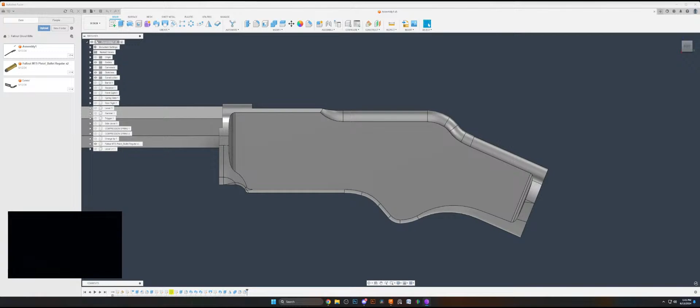All right, guess I gotta turn my cam on. Let's get started back on this - the Ghoul Rifle.

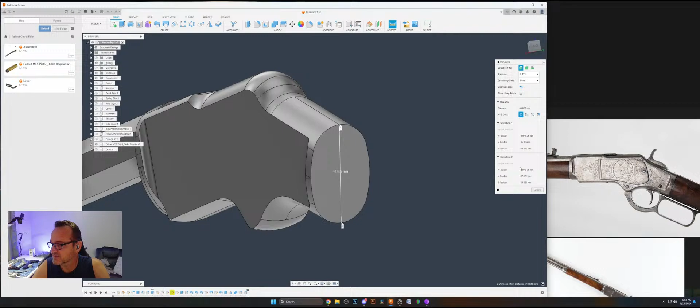Let's look at some of these parts pictures. So I really need to make the tang off of here right now so I don't forget those. Let me see some pics here - how wide? About 12.

Excuse me. That's the top right there. We're dealing with paint. Okay.

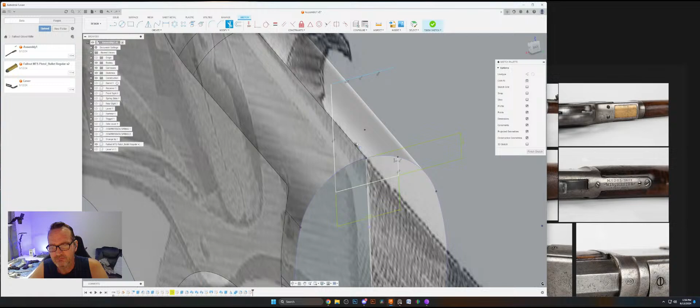Why would you do that? Why? Why are you not filled in? There's something that didn't... it's always something. What? Why did it?

I swear on everything, if this software for one day - if they could just fix the small stuff instead of worrying about adding crap to make more money off of us, it'd be awesome. Fix your stuff. Fix your stuff. Fix your stuff.

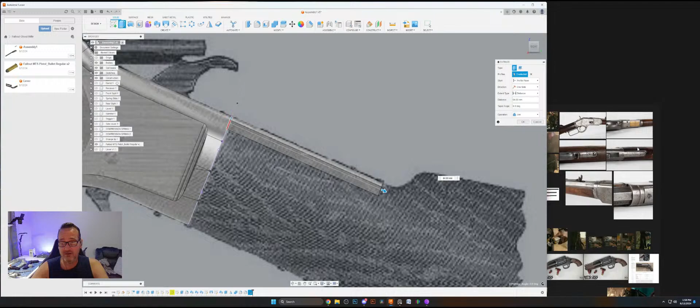Got dog hair floating around. Oh. Okay.

A big O screw. So we did 12, right? So let's go in here and go ahead and do our butt end. Let's go back to our old drawing. Probably needs to be a tad longer, going to 67. There you go, that'll work.

So this tang, like on my other shotgun, this will be a part that prints separate from the body just because of how tall that is. Plus, we want to be able to do an insert that goes into the body and comes back here that will be printed in a separate direction that will reinforce this whole thing, same way we're going to do with the bottom down here.

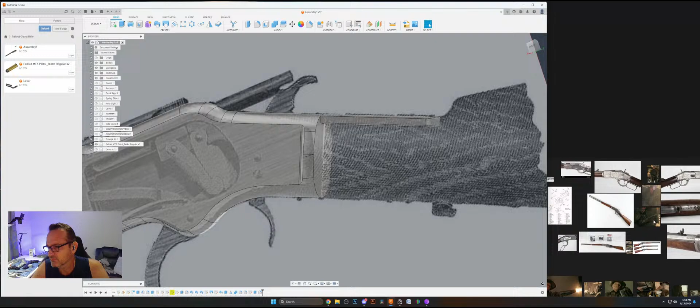Now, is this one of the cases? I meant last night to go back and get some more reference pictures. So why do we have a...

How far back does that go? Ooh, that's a good long one. Now take it - that's a screw head. Think it stops - this one stops right above here. This one continues on, that looks like that's about where it continues on to.

Are they about the same width, or... hang on a second.

Why are you... oh, you suck. Completely and totally.

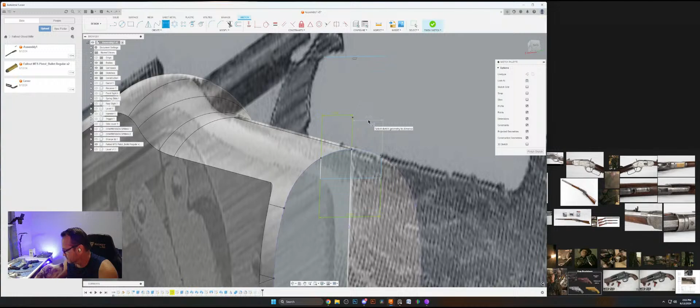I love you, but I got work to do. I got work to do. I got work to do. Can I do some work, please? Can I do some work? Oh, I got - you want? Do you want a treat? Oh, see, look at that. I'll be right back.

It's amazing how your dogs love you and want attention, and then you mention the word treat, and all of a sudden they're just out the door.

Okay, so if you're... 7, I think it's going to be the exact same thing down here.

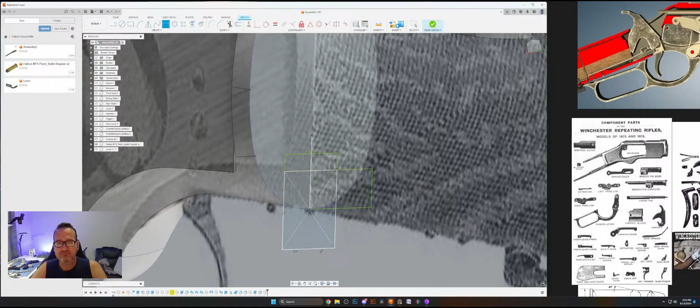Son of a. I'm about to lose my ever loving patience with this freaking company, man.

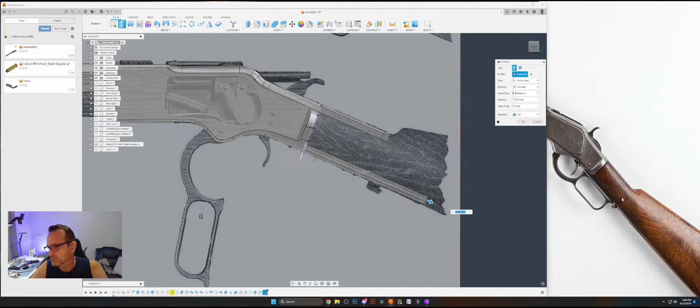They're exactly parallel. Okay.

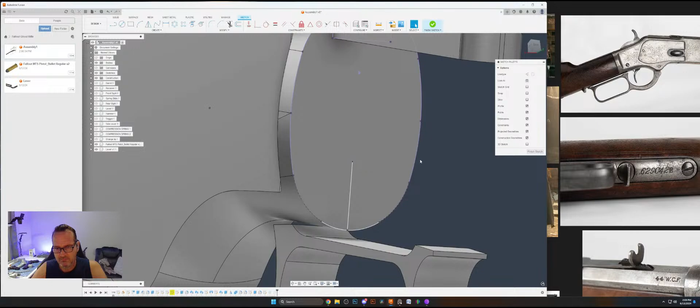127. See, that seems to be slightly off. Well, I'm going to go ahead, take these to 13. Oh my God.

So we should be 1 millimeter outside of that, or half. Yeah, about a half. Yep.

Now, in comparison to the trigger, what's the width? Because the hammer and trigger are going to be about 9 millimeters wide. So that's 12, 1.5.

Yeah, whoever modeled the lever did a really, really good job on it. I'll give them that. I'm going to redo it and change up a few of the angles.

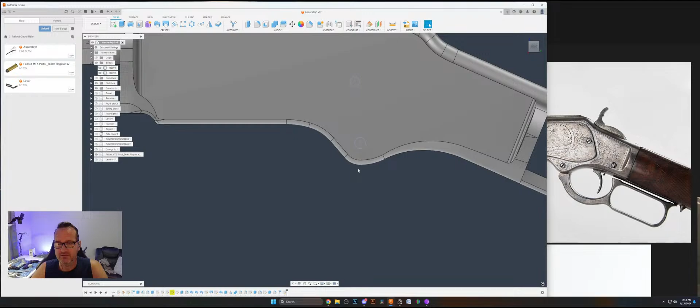Let's look up some screws here. Hang on, let's do this. So the head is basically about 5, excuse me, about 5. So I think these...

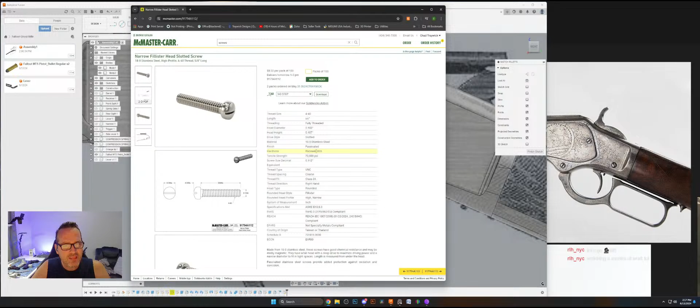See what the Fillister head screws are like. See, Fillister heads are way smaller. 0.183, 462.

Because all the 440 screws I carry are Fillister screws.

The 8-32 Fillisters are too big. Was it? Was I looking at the 6/32? Were they Fillisters? No. See, yeah, they were Fillister screws I was looking at, which I don't have any of those.

0.226. Yeah, I did. Those are 574. About 5 millimeters. Probably gonna have to start stocking all different screws just for this.

But in a 5 millimeter range, inch, 440. No, what did I say the 440 was? 0.183. I just think the 440s will look ridiculously stupid in there.

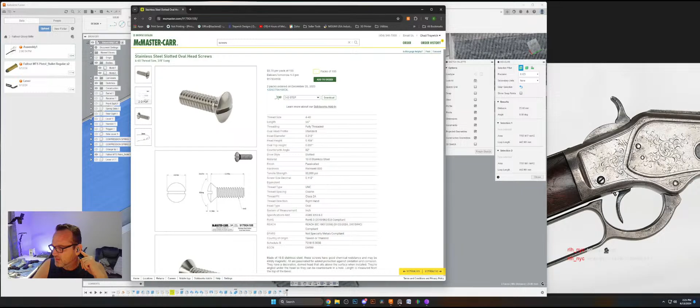What does the other side of the rifle look like? So they just come out blunted, which is fine. So, how about some 1 inch ones?

So it's 1 inch. And what were we at? 0.905. That's not going to work. 3/4 are way too short, and 1 inch is just a tad too long.

How much am I going to blow this up if I go in here and increase the overall thickness of my body? That's not what I wanted.

If I go to 30, is this going to blow everything up? Didn't really blow it up. I mean, I got to fix that on the side there.

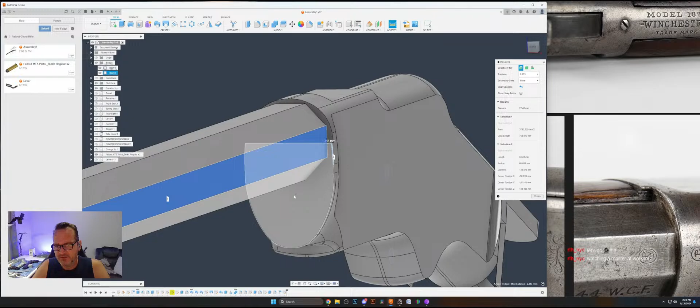What's our distances here? .3. And then the wood. I don't see anything else that broke. Just that crap on the side there.

Question is why did it not save? I'm assuming it's this one. No.

Don't break my stuff. Is there enough edge on here to...

Okay, where's this loft at? Why, oh why? That cut into my body? Starts to. All right, let's fix this sketch.

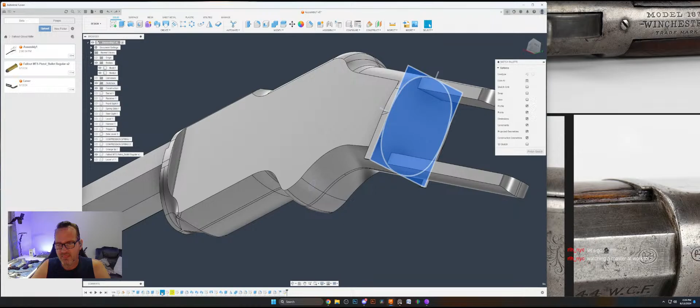Okay. I think it's doing that. Let's see, did that mess with my body lines? No, it kept my body lines. So it's just so thin, it's so thin that it doesn't exist. That's cool.

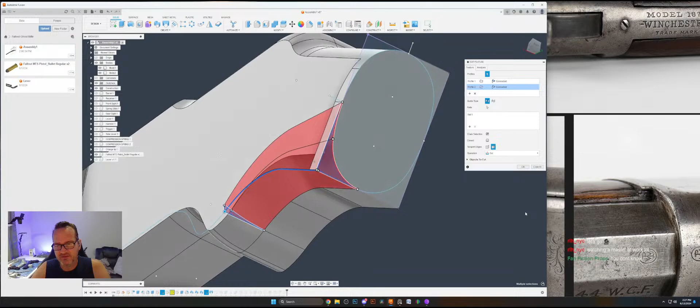And so when I do this loft, I take that out and put it back. Oh wait, I see the dealio, I think. Yeah, yeah, see?

So is the sketch... so the sketch... okay. So let's see, I see the problem. Redefine. Don't break. Ah, there you go, baby. That's what I'm talking about.

All right, let's go over and fix these little tangs real quick. There you go. Except that is not the center line anymore. That is. .5. There we go. Get our height back.

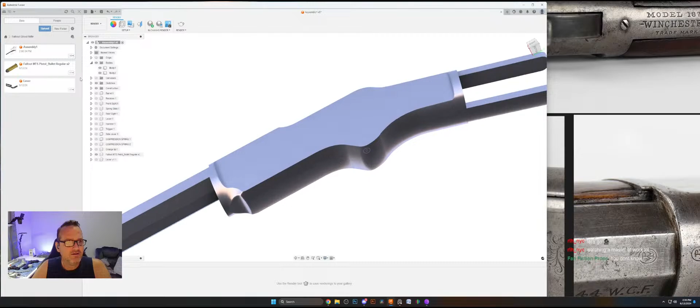Okay. Let's delete you, just recreate you from that point. Okay, all right, I think let's go in here and just make sure everything... yeah, okay, there we go. Let's make sure everything still is smooth like it should be. Yep, okay.

Get all that saved. All right, so now our screws that we decided on were 1 inch. So that is almost 1 inch. I don't want screws protruding out of the side, or do they just... that one goes in the body. Yeah, I don't want them protruding. So to pick up that 0.4, I'll change

this extrusion to -2.8. I know you're going to break my fillets and stuff, I get it. And these need to be 2.8. Okay, there, those are back like they should be. Now this should be 25.4 exactly, so 1 inch exactly.

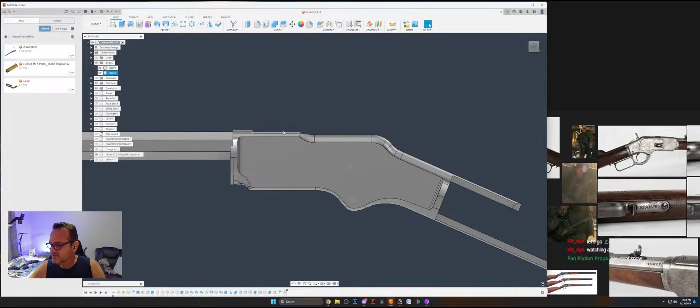Okay, what was I doing? All right, I know what I was doing. So 1 inch ones. Grab the part number here. Let's insert this from the catalog here. Just another screw that I have to start stocking. Hello, hello, there we go.

And normally I don't get into the screws yet, but dealing with these older Western style screws, if I don't figure them out now, just like I had to adjust the body width a bit, I would end up having to go back and do some edits and changes.

Excuse me. Guess I could just mute it. So now back to what I was doing. That needs to actually be like a 3. Capture the position, come on, let me grab it. Let me grab it. There you go. Symmetrical.

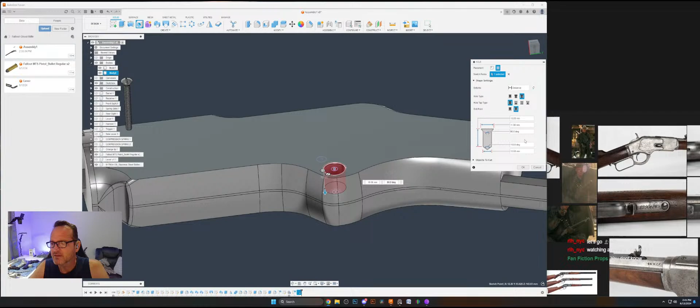Especially for these oval head screws. Do it right there. So it needs to be a countersunk. Let's pull up our dimensions here. Needs to be 82 degrees.

Da, da, da, da. 25.4. Head diameter is going to be 0.214 or 212. So that needs to be 5.3848. And that needs to be 3 millimeters. But

question is, how do I get clearance? I gotta have clearance. Add 0.2 to that, or 0.4, so make that a 7. Let's see how well that works. If we can do a joint here, we'll joint to there, to right there. Let's see if we can have any interferences.

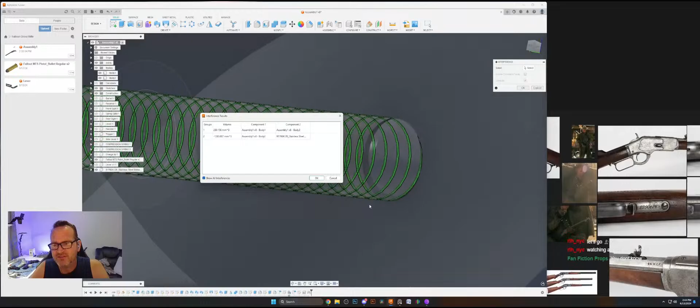How much of an interference is that? That should be perfect. And this head should actually come back 0.3.

By the time you paint and that sets down in there, what's our distance here? 0.24. Let's adjust this hole just a little bit more. From there to there needs to stay 1 inch.

Because 1 inch is what I was looking for from there to there. So this actually needs to back up.

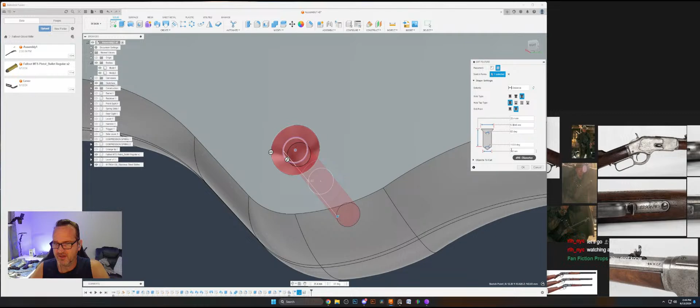But what I don't like about... okay, so what? Try decreasing the size of this again. Put that back at 3. Yeah, that actually works.

One. So let's see what our interferences are. So we only have thread interference. We have clearance for the head of the screw. That's perfect. Okay.

There we go. And we are inset just a little bit. So that'll work. There we go. Turn joints off. There we go. And we will hide the sketch as well.

Put the guy's lever back. Just to make it clear, I didn't make this lever. A guy had measured and designed this lever, and I'm using it as a reference for scaling with what I'm doing. So I will be recreating this.

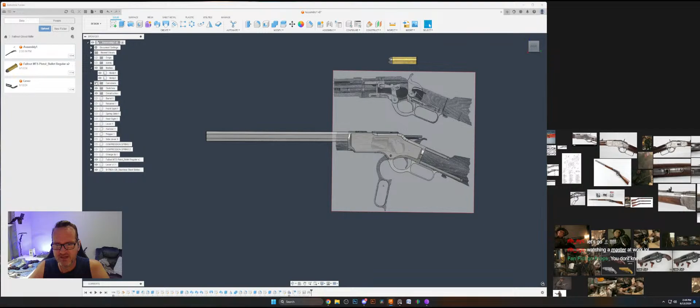Okay, before I get too much into the body, I want to figure out the barrel and the length. That's what I want to do. And on this canvas, do I have another good picture to use as a canvas for the length? I can try that. Most of the problem is I drug all these straight in.

Export, selected image, details. I already went through this, I think. Oh yeah, we'll just use that. Or weren't these the wrong year models?

No, they're the correct ones. Well, semi-correct, I should say. So it's going to be one of the top two. Okay, so canvas. Oh, it's not visible.

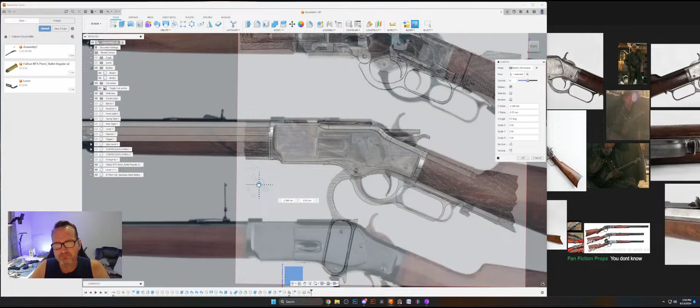Close enough. All right. It actually lines up pretty damn sweet.

So let's go ahead and get us a sketch on that plane. Actually, you know what? I want to do this bit different. I want to do this different.

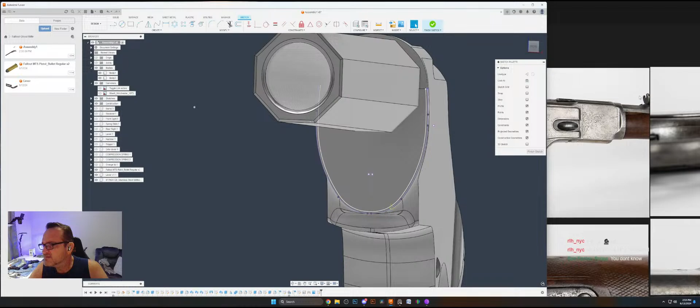For the foregrip... okay... and then it does look like it curves, comes up about the same height as the notch.

Okay. All right. So we're going to probably leave it the same height. Get a cutout for the barrel here. Definitely want to offset.

There we go. So negative .5. And honestly, I think just keeping it dead level with what we have here, I think that works out quite well.

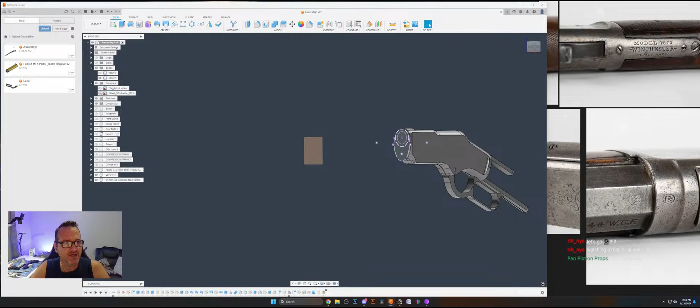So now what I'm going to do is I'm going to come in here and project my outline of what I want the inside of that to be. Except something's not right.

Shoot. All right, I got to back up here. I forgot something. I increased the width when I... by 1 millimeter.

29. So from 29, I'm going to 30. Can I please? Now I get to break stuff.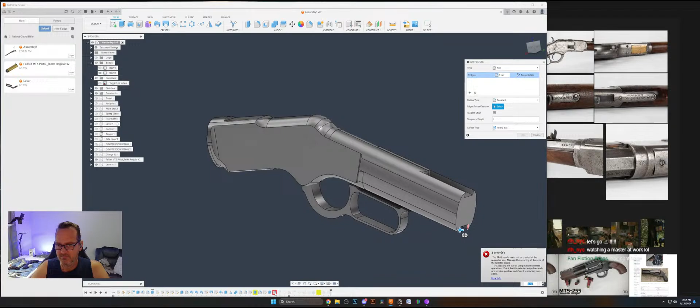Yep, I knew that was going to happen. Oh, unhappiness. That's fine, we'll fix this real quick. But my question is, that puts me back in center. Okay, so that had thrown my center off on everything. Okay, yeah, okay, not a problem.

6.5. So this is my center line. There we go. Okay, top one is fixed. We're back to this again.

Okay, all right, all right. That's fine, that's fine. You can be a hard head. Or maybe you can't. Why are you being such a pain in the ass? Okay, I think it's actually the second one now that's being a pain.

So let's get our center line back. Let's get you back on center. Let's go ahead and just put you in here because I know you're going to be a pain. Can we not do that? Yay!

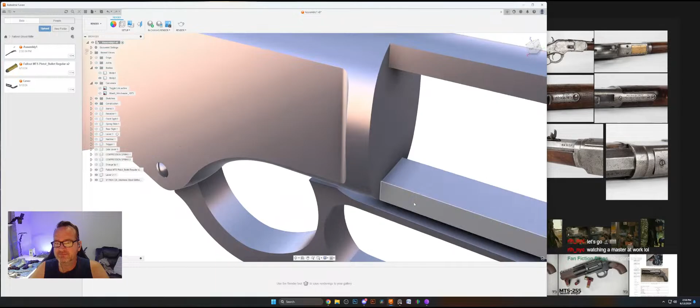Get back over here and take a look at it in some bright light. What? Okay.

That's actually fine because that is where we are going to cut those off anyways. Right now, this body is - how tall is this thing? 299.

Technically, I could print those all one piece and drop inserts in here to strengthen them. Do I want to do that? Because 9 times out of 10, one of these is going to get broken shipping. I don't know, I'll figure that out.

Back to what I was doing. Okay, first let's double check and make sure everything is back in center. Go back to this sketch, check our center line here. We are back in center.

Okay. And we are back on. Go back to this first one and redo this whole.

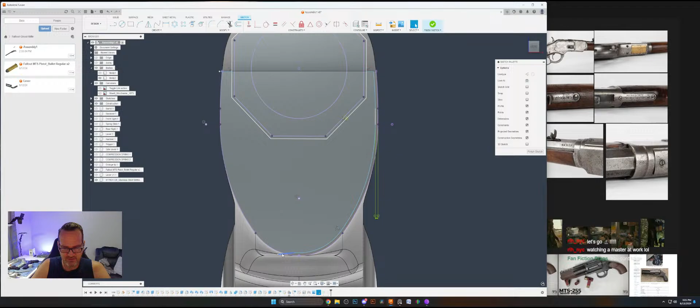Negative 0.5. Actually, you know what, just so I don't have any issues, let's just redo this whole inner. Negative 0.5, there we go. We just do it right to begin with.

Perfect, all right, now we get to this sketch and we just get rid of all of that. And we come back, and let's reproject all of our lines.

So what it looks to me like is this develops a slight curve up. So let's finish that sketch. Let's just drop one in here so that I can measure where I want this to be.

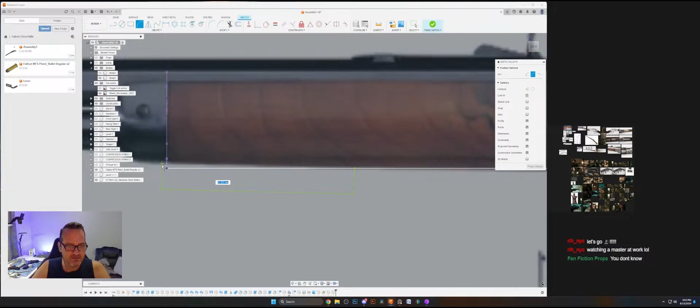So if I come over here to that and I draw a straight line out, perfect, right about here. So this is going to be 1950.

Besides it sloping up, actually, let's look at this again. Not much, it's the same slope up.

I'm assuming I need like a picture from the... I'm assuming they're going to have it hold the same. So let's do this - 195 up. So that's where we need to get this bottom to.

Yeah, I'm on the right sketch. Why are you being a pain in the butt? I just want to break. Sometimes you're a pain in the butt. So I want to not chain.

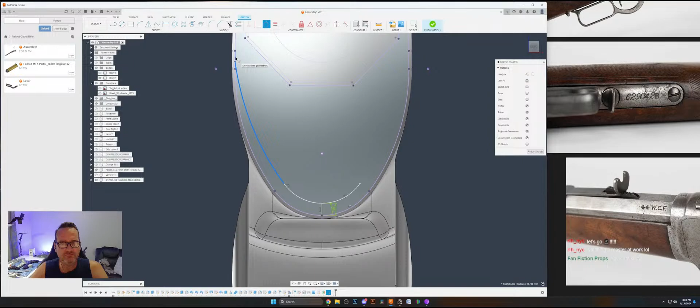Negative 9.5. Okay. Is that going to be too small?

To loft that to that, I'm going to have to put 2 rails in. Not a problem.

I want the top to stay straight. Oops. Second, project that.

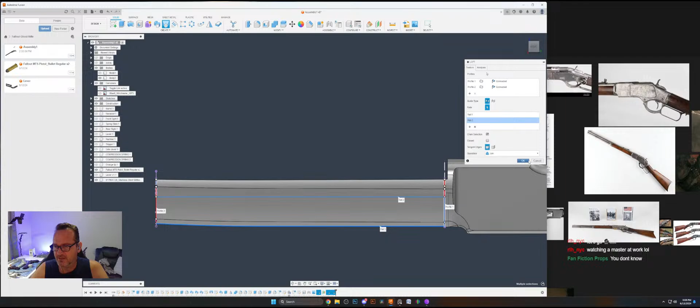That is not straight up top though. So I need this sketch to go away. I need a sketch off of this angle.

90 degrees, okay, hopefully. Oh, damn it, I deleted my other sketch. Son of a... not what I meant to do.

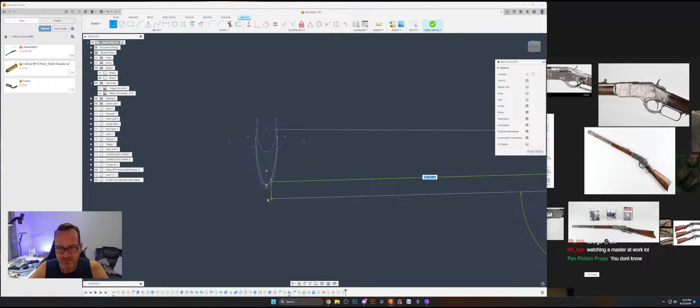Need to go straight out. Turn my canvas back on. That's the bottom, and that's okay.

All right, let's try this again. Wait, oh, I couldn't see it. Loft from there to there. I want to use that, and I want to use that. Now that should keep dead straight up top, giving my slope on the bottom.

There we go. Yeah, baby. But I meant to tell this to make a new body. Yeah, yeah.

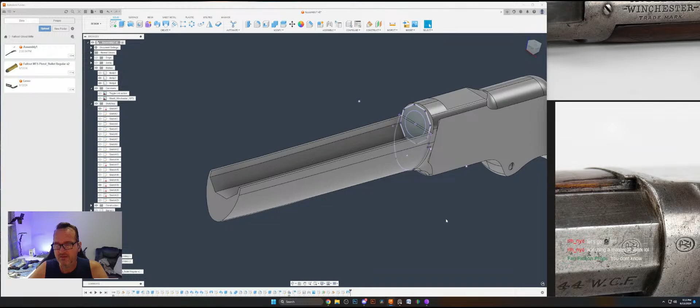And I guess it was originally meant to hook up in here. Let's go ahead though and get our cutout for our barrel to set flush. So now I should stop getting interference warnings about the barrel.

Okay, just a screw. Baby, stop barking.

Almost looks like they put another strap. That's the body. Yeah, I'm going to have to pull up some more reference material in a bit because...

All right, let's go ahead and make the cap real quick, and then we'll get our under tube put in. Actually, let me go ahead and make this notch because I think it's - how much space did I give myself from here to here? 0.5.

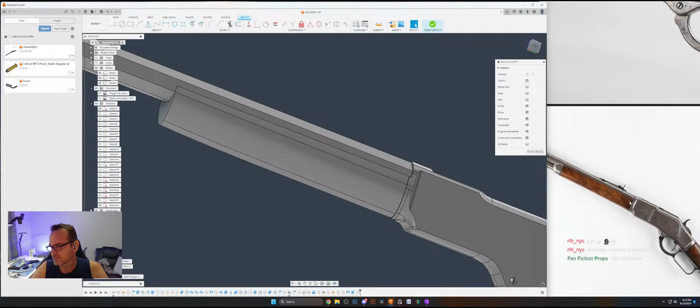Actually, we're not going to do that then. So on this, it looks like what they did. Wait, that pinched that too much? No. No, right? No, that's correct.

Going to taper. Go under the rendering. Yeah, that's better. That's fine. That's fine.

And we will make this just a tad bit. Oop. Wait a minute, wait a minute. Wait a minute, wait a minute.

This is dead straight over here. Oh, you piss poor... because I didn't do one on this side. Dadgummit to hell and back.

Let's do this so it's correct. I need to put in another sketch on the other side over here, because you don't know what I was trying to do.

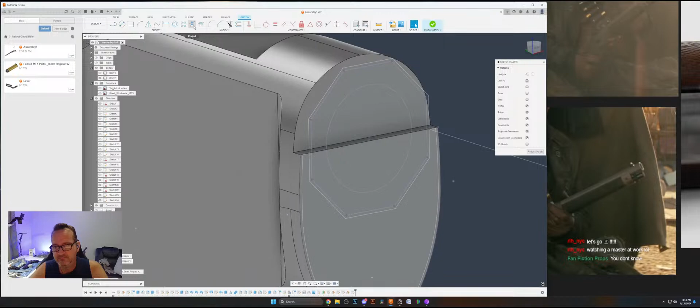And project that point, and project my internal point there. I want to go from there. And that's definitely my fault - that's not a software fault, that's just my ignorance. I knew better.

Guide rail, guide rail, guide rail. Now we are perfectly flat across the top. Nice. There we go. That's why that was looking so funky a while ago.

And then let me redo the cutout for our barrel. Turn that off. I do know.

You done with your project yet? Are you slacking? Oops.

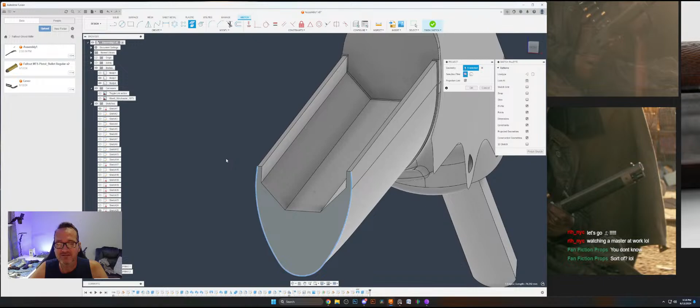Sort of. In other words, no. You're playing Fallout again, aren't you? Or no, what was the name of the game you were playing? The alien with the talking gun?

Yes, the joys of modeling, I'm telling you. Well, it's either I'm fighting the bugs in the software or the bugs in my head, so it's one of those things.

So we're gonna go. Actually, we're gonna finish that out. We're just gonna make that 25.4. I don't like that. I guess that's correct because it comes up and it levels out.

We're gonna say this needs to be a new body. Turn this crap off. Okay.

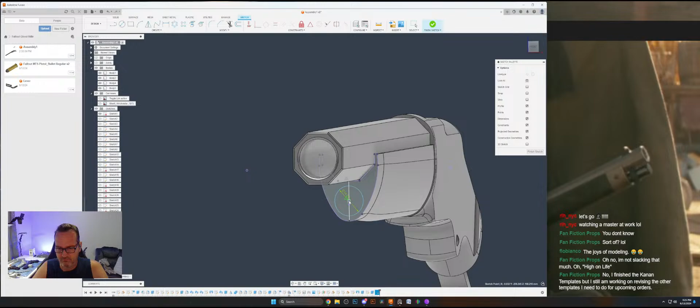So now I need to... let's see if that even looks somewhat right. It's about the right.

Let's cut this barrel down real quick. So this, I think... probably should have cut the barrel down first.

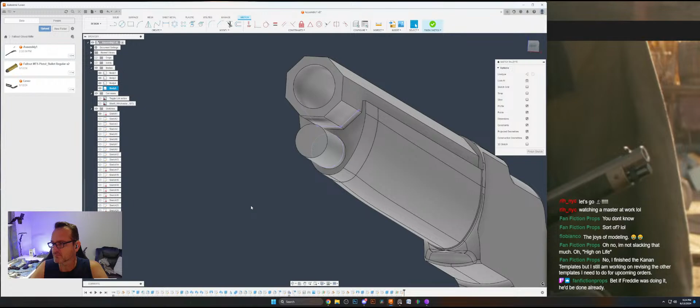So that is going to have to be 3 separate pieces. So offset by 0.3, because that goes up inside the barrel.

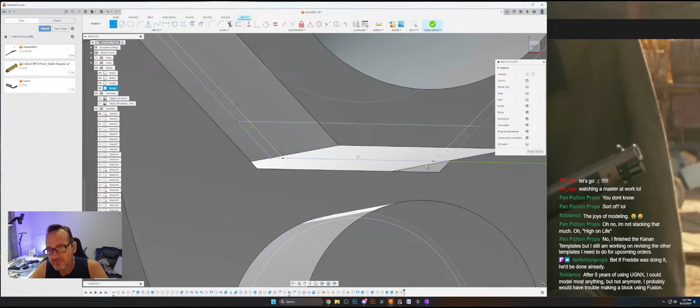So this is where we're going to bring - I'm going to say, if it's not, I'm doing it anyways because I think it would look better coming out of this rounded.

Wait a minute, damn it, you were supposed to be... oh, 0.3. Eh.

Yeah, I'll say center line.

So, well, I'm slightly dumb, gotta freaking do the other part before I do that.

Need to offset, that's 0.3. So need at least 2.7. Nope, that's too much. 1.9 then.

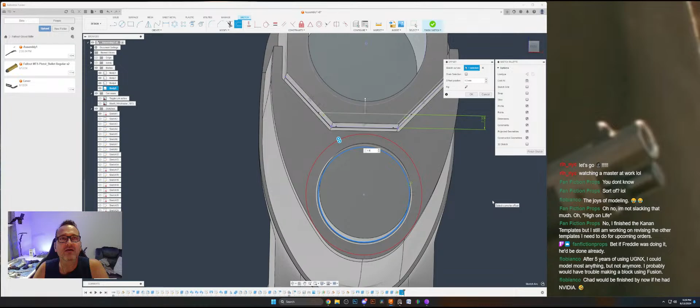Oh, see why you got to bust on my ATI? I'm just smart enough not to spend that Nvidia money.

I think this needs to be more like 13. There we go. There we go.

See, Michael, I know you talking smack about my stuff because even your daddy knows. See, I'm telling you.

There we go, how's that look? Yeah, that's what they all say.

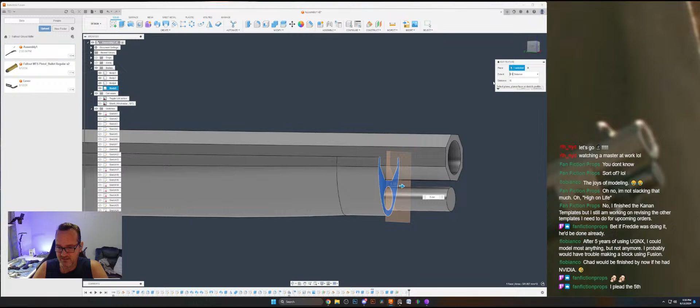I still need to shorten that just a tad, but...

-0.25. All right. Oh, that's just too deep in there.

How's that? You know what, I don't need the space up here.

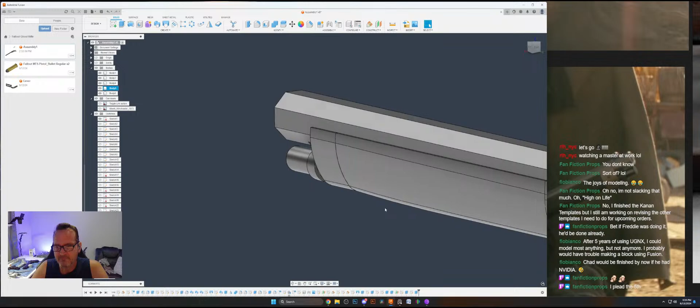Wait a second. You're supposed to be bigger. Why are you not?

There we go, there we go. You're supposed to be larger.

Oh, that's pretty. I like it. Wait.

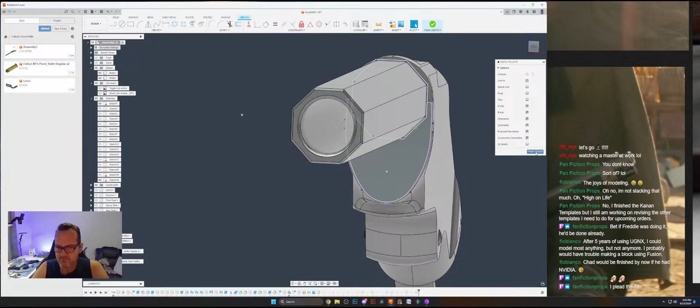Why did it decide to put a...

That's why you put that in there. It's still there, though. Hmm. Okay, whatever.

One, two, three, 4, 5, 6. Nope, that is correct.

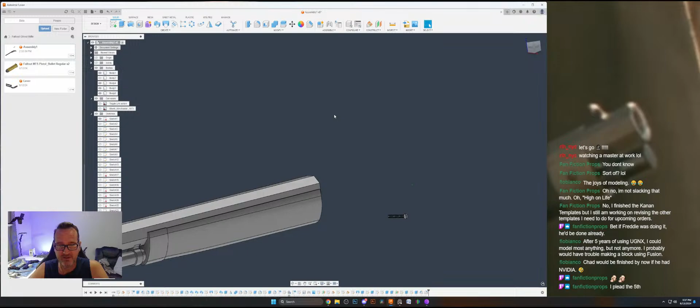Now, do we want to rifle the barrel? Actually, before I rifle the barrel, I need to make the barrel fit in the body.

Turn that off, turn that back on. I want to chain those. -1.

Extrude by 3. Another one here. Project that, turn the barrel off, turn the body on, go out 0.3 and extrude this 4. Now our barrel has room to sit down in there without interference.

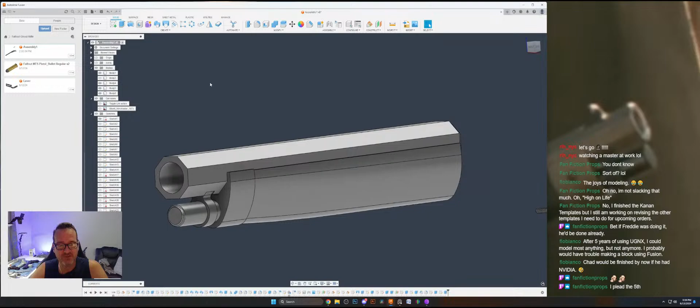All right, so we need to rifle the barrel. And they have made it 10 times harder to do it in this software. Offset 0.4.

Any? No. Dadgummit. Okay. Back in here. Let's make us 7 rifles. Ah, screw it, we'll twist the hell out of it. Nope, that's not what I meant to do. I want to do this.

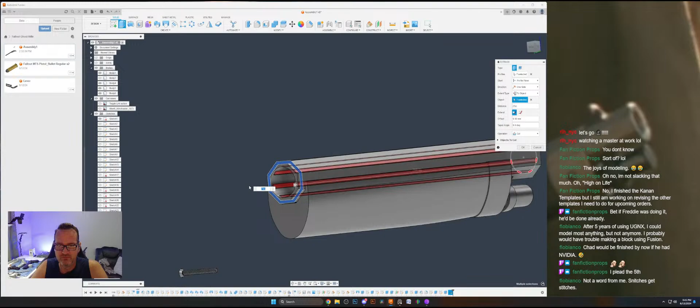All right. Dadgummit, 2. I don't want to take the rifle all the way. Now, trying to remember, there's an easy way I figured out how to do this. Was it? Don't remember, because I think they screwed the coil all the way up.

Yeah. I don't think it was sweep. Twist angle, was it? I'm pretty... no, it wasn't. Wasn't. No. What gun was it that I did the last rifling in?

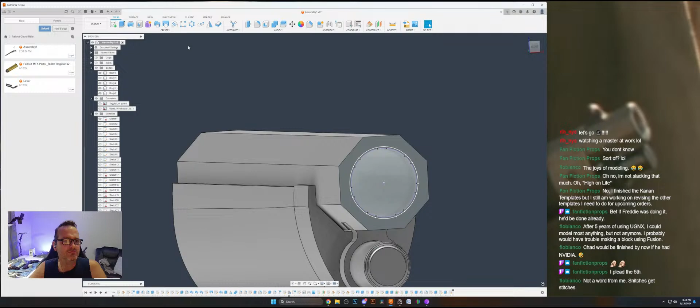Hang on. Right, you won't let me use that. I think because that is twisting around the outside. Let's try this.

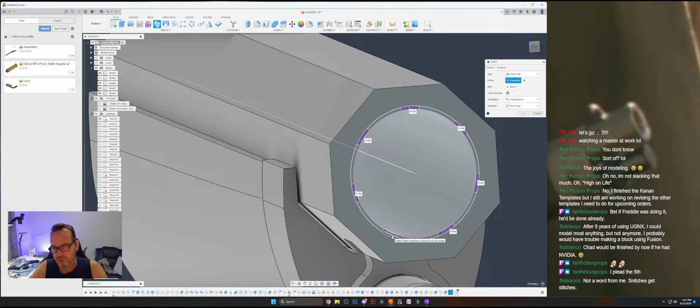Oh, that is what I did last time. There you go. Not exactly a rifle. Well, I guess it is. Gets the job done. Yeah, except why did you cut out half my shit and not my other shit? That's some of that Michael stuff right there.

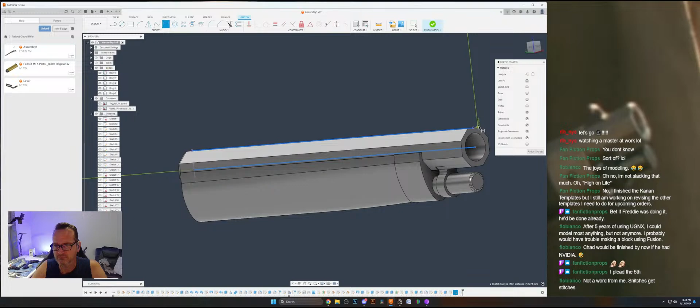It's almost like it's going at a slightly skewed angle. 0.0. Not. Well, that's weird. Even though a zero angle to another line still was not a zero angle. But as soon as I parallel the lines together, we're good. Gotta love it, just remember kids, zero is not zero. Whatever the hell that means. There we go, we got a twist in the barrel.

Chamfer this real quick. There we go. Move this off. Too much, too much, too much. There we go. That's a big old barrel. I got a big barrel on it.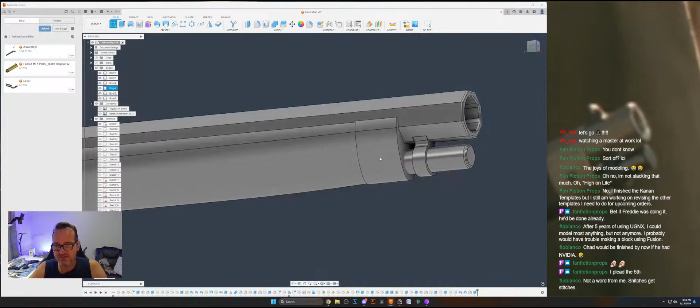Then we're going to put a sketch on top of that. We're going to project that. We're going to offset that by 0.3, so we got room to dick around. I'm going to turn that off. We're going to extrude this by -3 because we want it to be an exact flush fit. And I don't know why you're doing that.

Let's look inside. That's perfect. Got wall clearance, there we go. And for this, 0.5. Actually, we're just going to start doing 0.6 so we're even with our layer heights. All right, so until I get better detail, see what detail's on there, we'll call that little dude done.

Point for it. Probably just gonna bring the edges in too. There we go, 0.5 it. Do 4, there we go. Make it all purdy. Looks good.

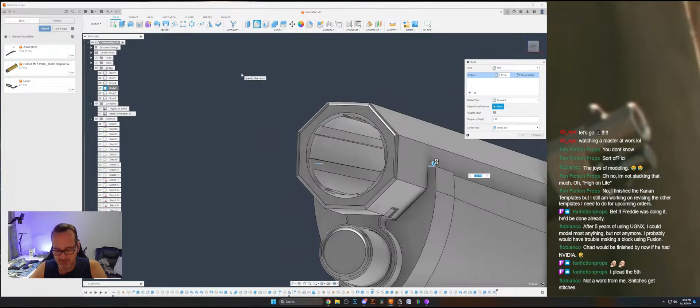Let me put a little fillet there. Just go ahead and do 1. Turn the foregrip off, foregrip off. Point 6. How's that meet up with that? That'll meet up fine.

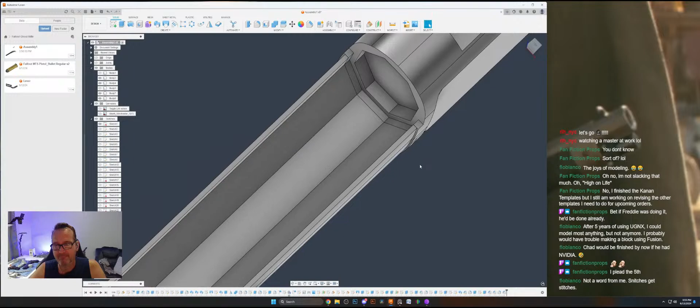Probably be best to do another cut into the body. All right, so we could do something like that. Drag you in. Drag you in more. Oh, you ragged sack of. How can you not let me? Hate you. Still gonna be a pain in the ass.

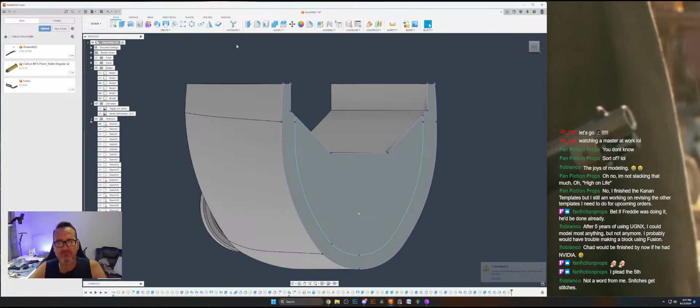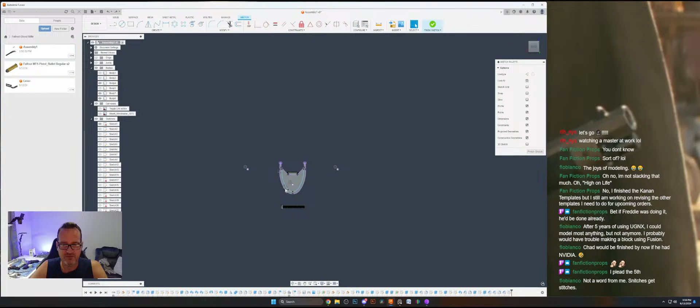All right, you know what? Screw it. Turn you on, turn you off. Hmm. Hold on. Hmm. What is my distance here? All right, let's reverse that thought for a second. All right. We don't need a big lock, we just need. Oh, you sucker, sucker.

One, two, three, four, five, six. 2.4 plus 3. 2.4 plus 0.3, 2.7. Yeah. So now extrude that out by 3. Project that. Turn body on, turn that off. Offset this by 3. That should give me my exact size of, other than you want to make these broken little lines.

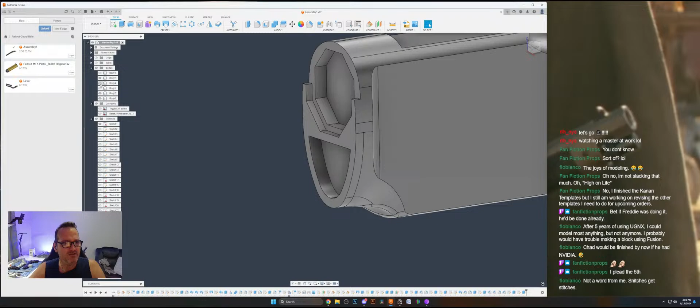Close enough, 2.4. So extrude this -4. Nope, okay, so you just want to go that way now. There we go, so that will fit in. Let's look inside. All right, so that all fits in, locks in, will allow it to fully butt.

Turn the body off. We'll do this, and this at 0.6. All right, turn that off, turn that on. We won't do anything with this yet, just wanting to finish up all of this. So now let me go through and put some rounding on some stuff, because it's wood. Wood is supposed to be round.

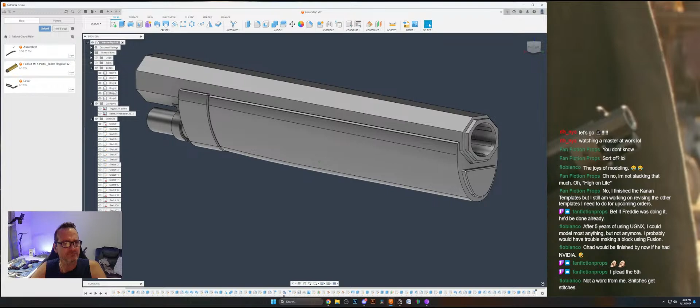So when we put our band back on the front, it's all going to join up. This slides in, got room to play for this being hard mounted to the barrel. That will be a nice steel flat. Let's turn the barrel off.

One, 1, 4, 1. 1, 1. That's what I thought. You're trying to egg out there a little bit. What do we got on this side? 7, 8, 4. Okay, alright. So we need to now - I'm going to assume that's like a retainer pin.

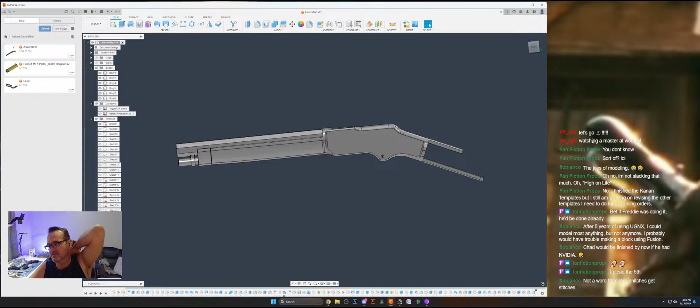Well, we're making good progress here. Like I said, I need to get some better pictures, because looks like they put a rear band on back here. I need better pictures so I can do the grip correctly. Wow, it looks like they've ran the metal strap all the way out. Could be wrong.

Yes. What if that's just a standard front sight they have on there? What the hell kind of sight? Oh, that's actually what looks like they have on there. Yeah, so they got this standard. Huh.

Well, let's use old Google here. 1870 through 1873 Winchester front sight.

Well, those don't look correct. Because it looks like it has this kind of sights on it. Of course, these are a little wrong on the year. Unless... wait. I don't know what that is.

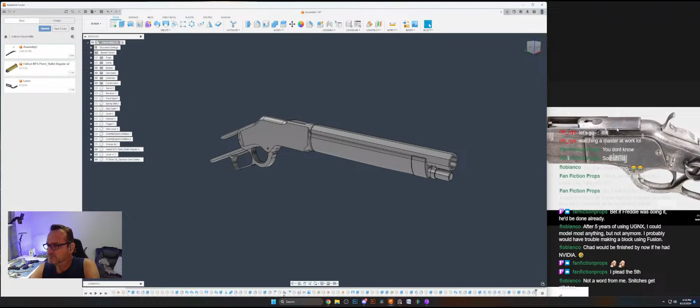I don't know, when I get into it though, cover on the side, so do the side cover. The bolt's going to have this door. How do those doors work, other than the screw? Looks like they have a tab up front, and there's a big flat leaf spring.

So screw in the center. Oh wait, screw on... where's the other side? Oh, okay, so the screw goes all the way through one plate and screws into the other plate and just sandwiches it. That's why I was wondering, like, where on the body does it screw in. But it doesn't, it just passes straight through and screws from one plate to the other. Ah, I see. Interesting.

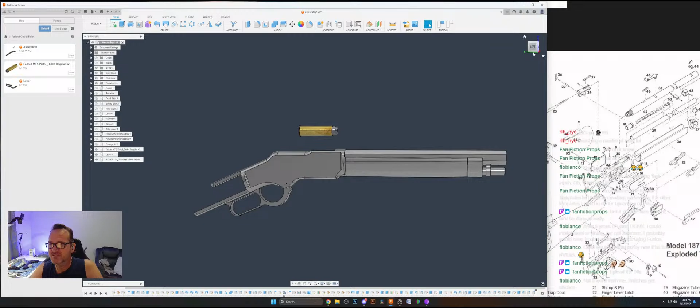Hey, how did my home positions get messed up? Oh, I'm duh, they didn't get messed up. Gotta go back to orthographic.

It's funny because in the show they show him kind of fiddling around like he's going to load it. Matter of fact, in this scene, he just kind of fiddles around with it for a minute, and the camera cuts.

Yeah, they're looking good. I'm excited to get the grip done. Once the grip is done, then I'll do all the internals and stuff.

So how long is this barrel going to be? Turn the body off here. Oh, wait a minute, body. So, 283.

I can print the barrel all in one piece. That's freaking awesome, so I don't have to cut the barrel in two. I can print all of this. The only thing that I will be cutting off then is these tabs.

Just simply... I don't know, I might try them first left on, and make the recesses down in here for you to pop in the support to support them.

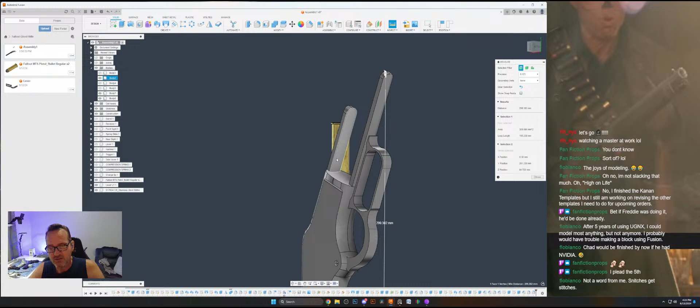I don't know, because technically that's getting on up there. Well, I'll try it both ways and see what the print quality is up here when it starts getting thinner and all that, but if that's the case, then I won't have to cut up any part of the body or any part of it, period.